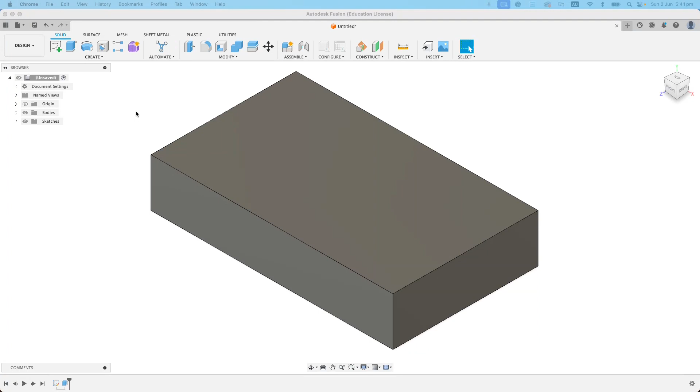In this tutorial we're just going to have a quick look at actually putting some holes into this block here. Now we can do that using the hole tool, which is this one here. And this is quite useful for a number of reasons and will probably build on some knowledge that you already have. But you can access it, as I said, directly from your create set of tools. If it's not showing here, just go to create here and then you can come down to hole here. The shortcut is H, as you can see there.

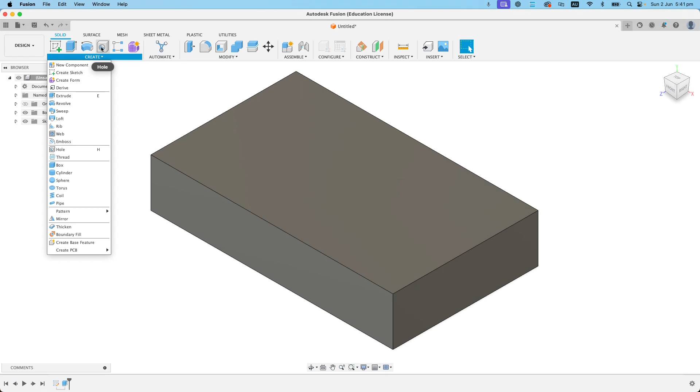And basically what it does is that it creates a hole on a face there or a plane. So let's do that. Let's have a crack. I'm going to click on hole and you'll get this little dialog that pops up. Now there's a couple of things to note here. I'm going to choose the hole type as just a simple hole first of all. So this hole will just be a typical simple hole that you're all probably familiar with.

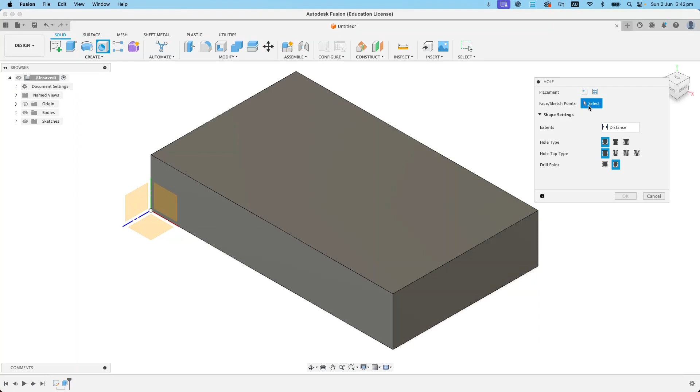And I'm just going to click somewhere on the face. You can see here, it says face. We need to select it. And I'm just going to click on the face there and we can see we have basically dropped a hole in there. Now, a couple of things to note. Here we've got some dimensions as in the depth. We've got the diameter of the hole. So let's just say this hole was maybe 15 millimeters in diameter. Actually, let's make it 10 millimeters in diameter.

Now, this material here, I think I have that set to 30 millimeters. So what we'll do here is we'll say, let's put the distance to all. There you go. So now that hole is going to go all the way through the material. And what you can actually see here is that it's referenced to an edge. So right now it's 47.478. So if we click on there and we click on this edge here, we can actually type in a dimension as in a usual dimension constraint. So I'm just going to chuck in 20 there.

And while we're at it, why don't we reference it from this edge also? So I've just clicked on that back edge and we might have 20 off there. So we've basically locked that in. You can see that there. Let's just click on that one there. Great, we've got that. And I'm going to say okay to that hole. So down here in my timeline, I've positioned that hole. Again, if I just want to edit it, you can see there we've got those dimensions.

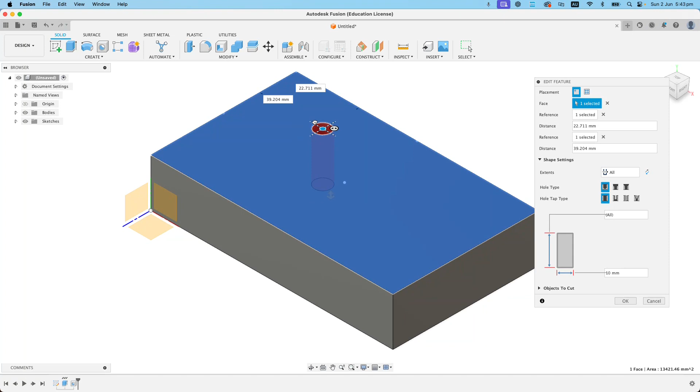And by the way, you can see I can grab that hole and you'll see that my dimensions are actually changing. So if I do need to reposition the hole, maybe this one is, let's say 30 millimeters there from that edge. And then maybe it's only 15 millimeters from that edge. Don't forget to click on OK. All right, so we've created one simple hole.

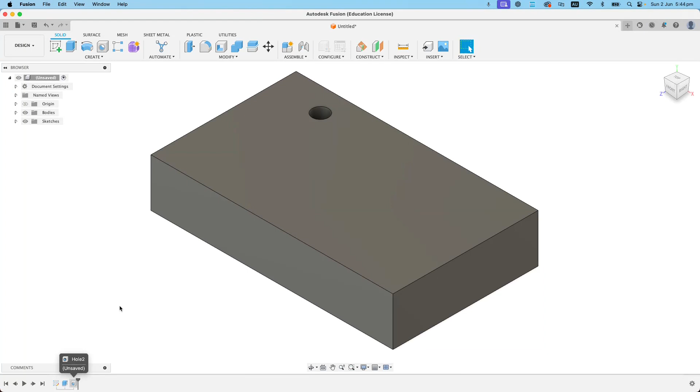Now, let's try a different hole type. So I'm going to go back up. I'm going to click on the hole tool. Now this time we're actually going to go with the second one along there, which is a counterbore hole. And you can see with the counterbore, essentially what we have is a larger size hole, which is drilled initially, which then continues into a smaller diameter hole, which goes through. So let's go with that. We'll select that there.

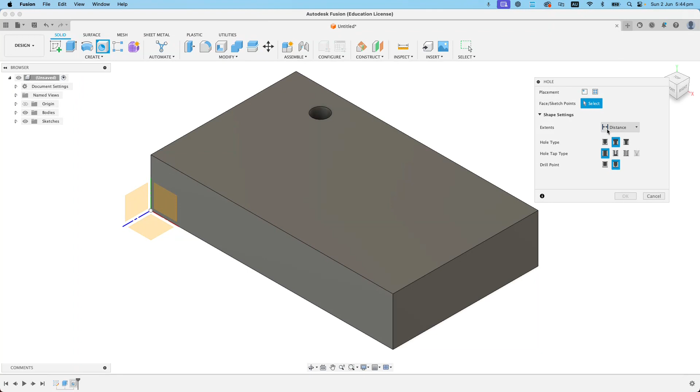We're going to keep our extents going all the way through this material. So let's just click on a face here to pop that in there. All right, so you can see in red there, we've got this larger diameter, it goes down a certain depth, and then the rest of the hole goes through. Now, counterbore holes are really, really useful for things like bolts, so that the head of the bolt actually sits on that inner face in there. So basically, the head of the bolt might actually be flush with this top surface. We'll have a look at that in class a little bit more.

Okay, so let's have a look at what we've got here. We've got some dimensions here. So let's talk about the initial diameter first. So maybe let's take this diameter here. We might have a diameter of 15. And let's say it goes down 10 millimeters. And then we have a smaller diameter. Now let's say it's 8, as you can see there. And we're going to have the distance go all the way through.

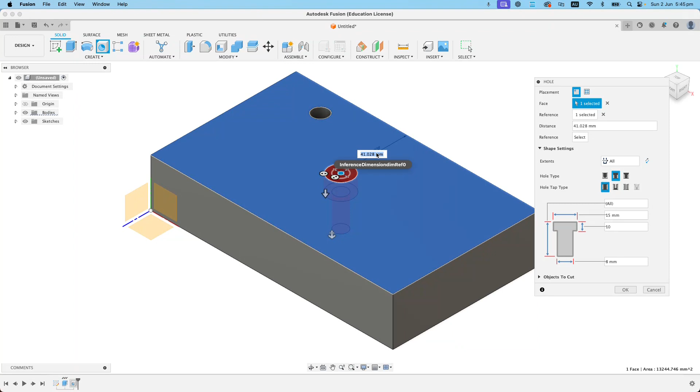Now we haven't given it a reference to an edge yet, so this hole is just floating in space. But let's say, okay, let's click on from the center to the edge there. Well, I'll just cancel that for a moment. Okay, let's try that again. So we've got 40 millimeters there. So let's imagine we're going to go 30 in from there. We'll hit enter to lock that in.

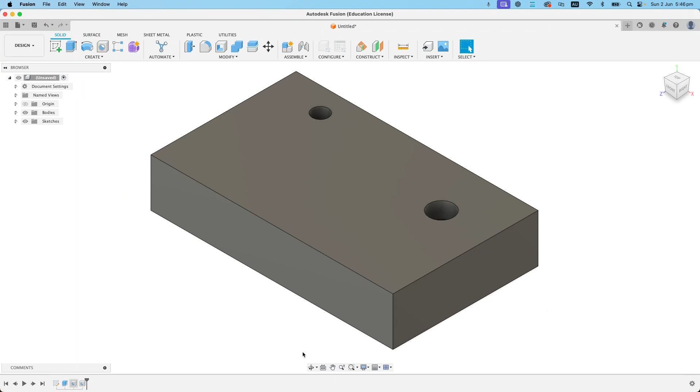You can see the little lock there, and we'll put a constraint from this edge, and we might say that it's going to be 30 millimeters in from that edge also. We're going to hit OK down the bottom here just to confirm that. And now we have a counterbore hole. As you can see there, it's got that face there.

Oh, my phone's ringing. Come on.

As you can see. All right, so hopefully that just gives you a bit of an idea as to how holes can work in Fusion 360.